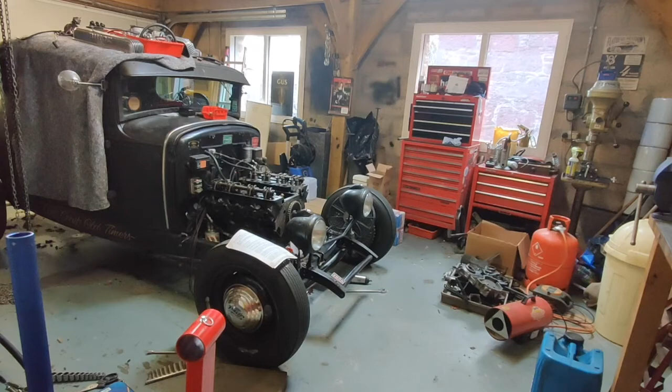You can see just what a gigantic mess everything is at the moment. Bits of my car all over it and the garage.

What's that shark doing there?

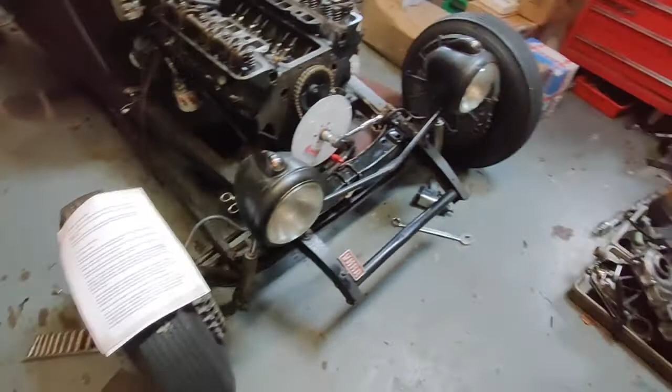Anyway, yeah, it's all a bit just whoa, too much stuff. Anyway, it'll all go back together and look great. Out in the garage, adjusting the push rods for the new cam.

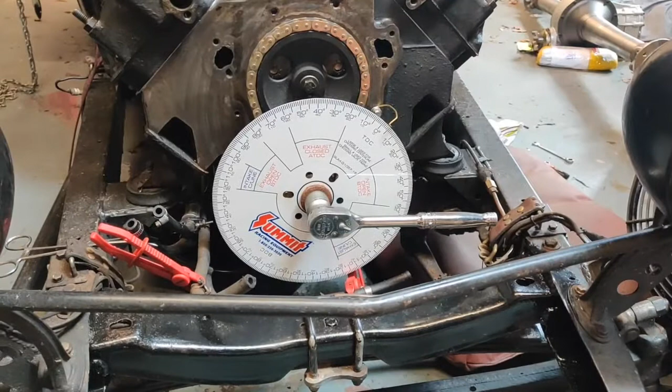It's frankly a really horrible job because you've got to get the preload using tiny little 3/8 nuts and lock nuts on this thing, and one-handed it's a bugger, but we'll show you the process and just how exciting it is. So you can see it's all set up with the degree wheel on the cam, and then we've got the new cam in all lubed up,

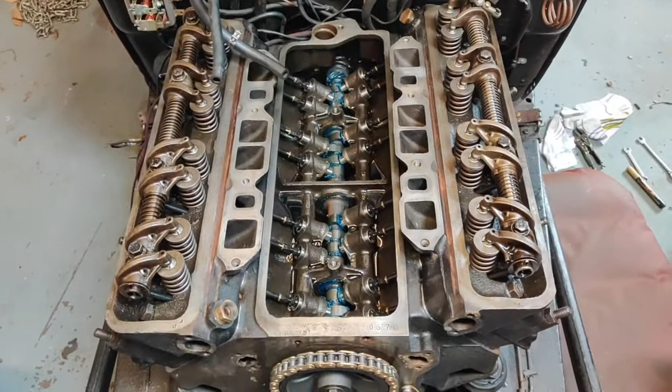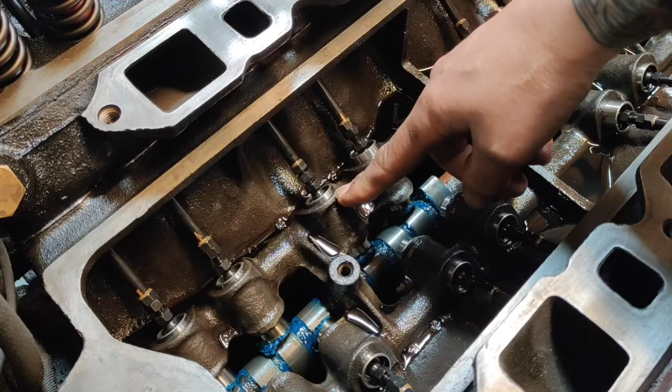yeah, setting the preload on the lifters. This is the one we're going to be watching, and then we're going to be adjusting that one. I'll explain that in a second.

Okay, so here's the theory. As the exhaust valve is opening, just as it starts to open, we adjust the lash on the intake, and then when the intake fully opens and then starts to close, we adjust the lash on the exhaust.

So let's do that. We'll rotate this until the exhaust is just starting to open. So we're going to go round, here we go. Exhaust is just starting to open there. You can see it's just coming up on the lobe of the cam.

The lights decided to go off because it's run out of battery. Of course it has.

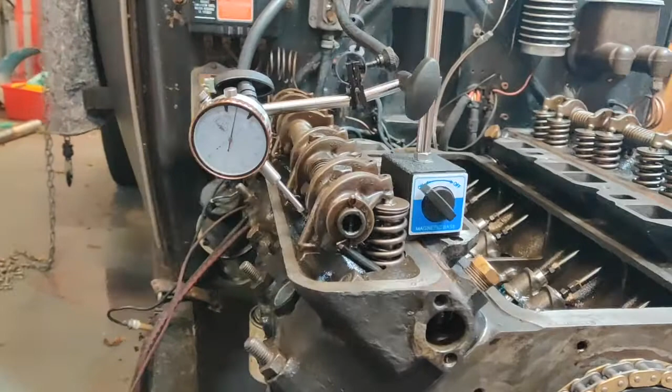Degreeing this cam is proving tricky. We've got a wheel, we've got a dial gauge which is set up as much as I can possibly get it right on the correct angle of that push rod. But the problem is the lifters, because they're not pumped up with oil, the push rod is not moving at the point when the lifter's moving, so I can't measure exactly when it starts to move.

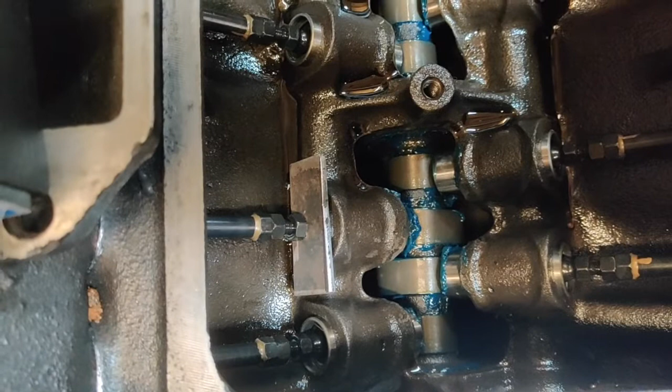So I've made a little piece which slots over the top of that, where the push rod meets the lifter, and that means that when a lifter moves, it moves the push rod at exactly the same point, and therefore we should be able to measure when that push rod's moving 0.05 so that we can get this measured.

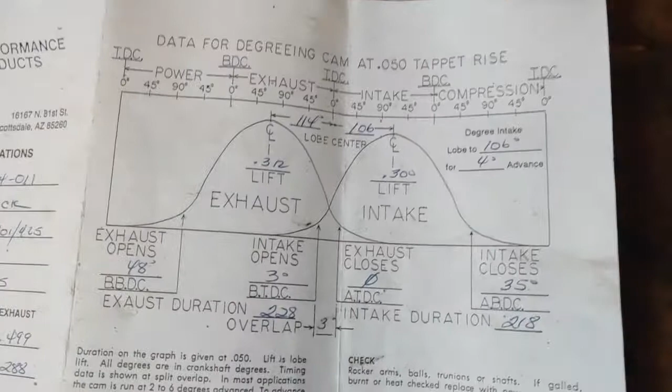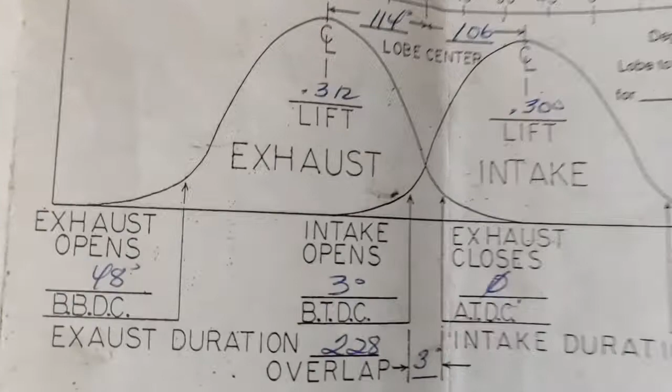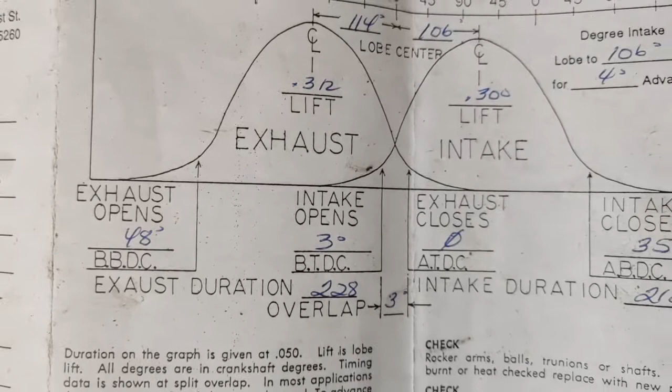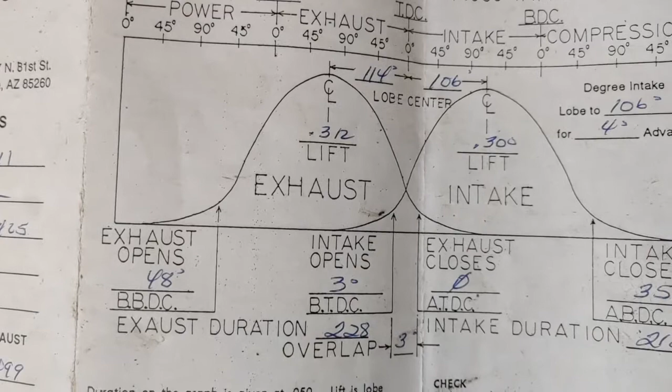Okay, so this is what we're looking for. These numbers here. I've checked the intake opens at, first of all, and it's meant to be 3 degrees before top dead center. And at the moment, we've got it at 3.5 degrees after top dead center. So it looks as if the timing gear is going to have to come off, and we're going to have to advance retard, I'll think about that in a minute, by 6 degrees.

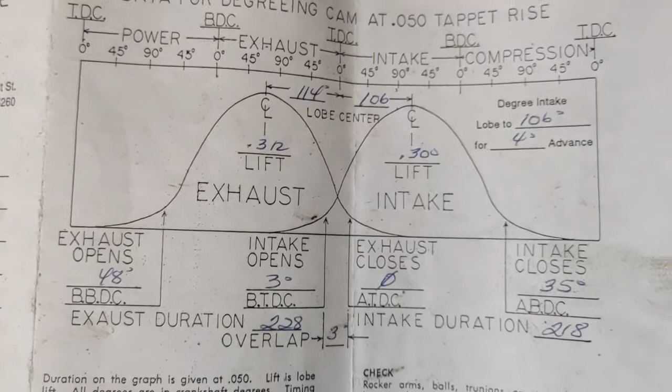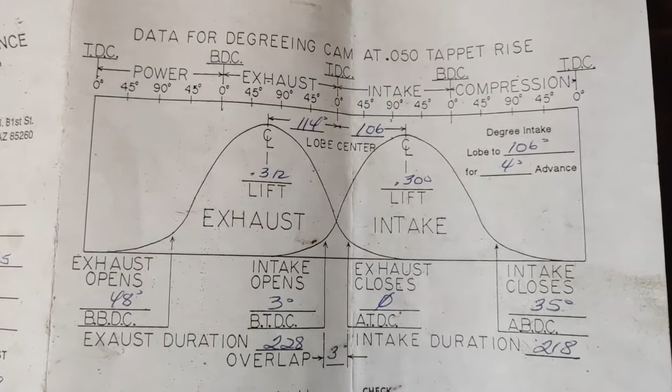Just to be double sure, I'm going to check the intake center line figure, and if that's 6 degrees out, then that'll prove that I'm going to have to take the whole thing to bits. First attempt was a cock up, because what I didn't realise was that my lovely spacer that was locking that wasn't locking it, it was moving about.

What I need to do is actually adjust that again so that I'm forcing that spacer to be completely rock solid with a push rod, which I can do by just adjusting the push rod so it's pushing down on top of that spacer. And that'll be solid onto the lifter, and then I'll be able to get a more accurate measurement. I couldn't understand why my figures were all over the place.

This is what I'm using. Just cut out a piece. And that, hopefully you can see, just slots in there and sits on top of the lifter. And now I'm going to adjust the push rod so that there's no slack, because at the moment we've got slack, and that's what was cocking up the results.

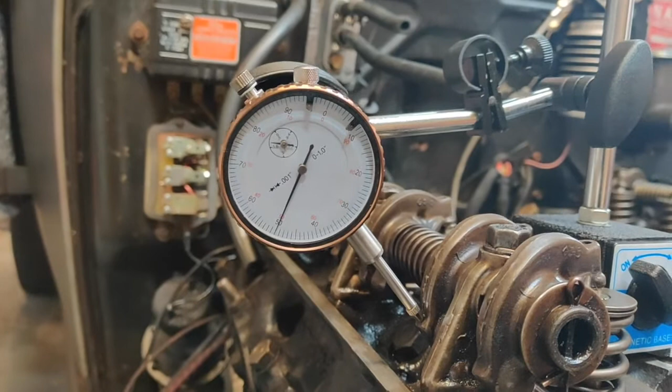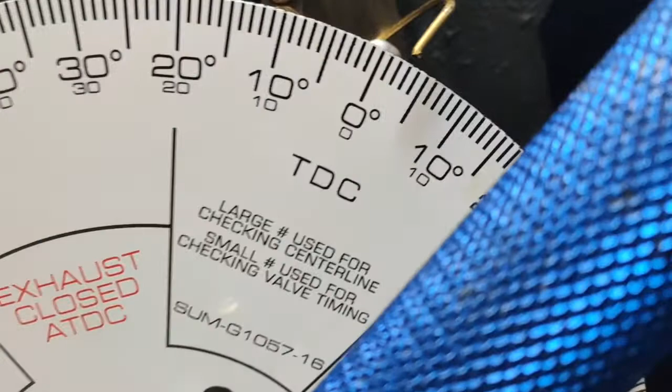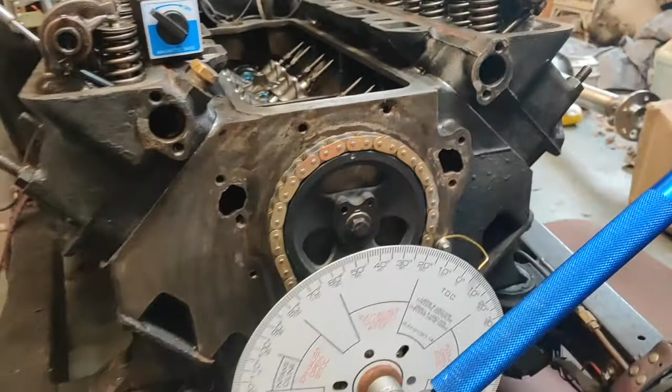Let's put a tiny bit of tension on that. Okay, so we've now got zero movement in here. We should get an accurate reading. We've got 50 lift, and that's 50 off the base circle on the intake, and we are reading, not straight onto that, but we're reading 3 degrees before top dead center, which is what it's meant to be.

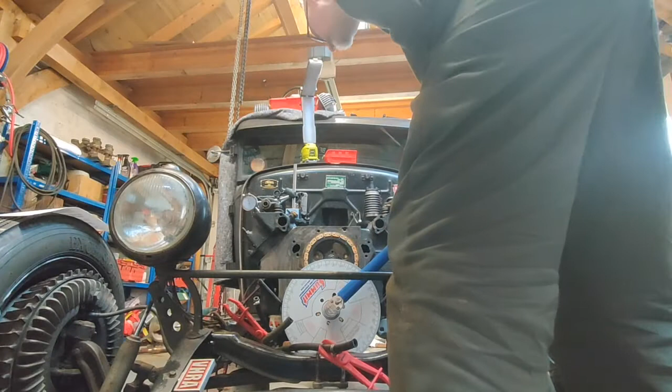So now we're going to go around and check 50 the other side of the base circle and see what number we get for that. Should be 35 after bottom dead center or something like that. I'll check. Let's find where it's going to be 50 off the base circle. Still going. Oh, here we go. And that is 50.

That's 50 off. And we are reading 45 degrees after top dead center. 45 degrees after top dead center. So those of you watching for the deliberate mistakes will have noticed that I set that up on number 3 cylinder and then couldn't understand the numbers. But of course it's all 90 degrees out on number 3. It was really tight to get into number 1, so I thought I'd check the exhaust on number 3, but that's why the numbers are wrong. So it's 90 degrees out exactly.

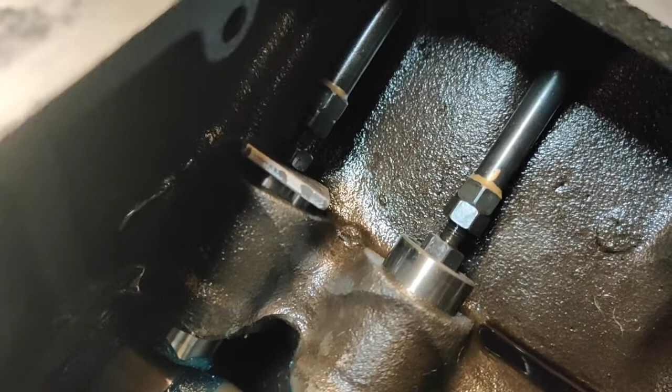I'm going to go back, modify the spacer, and check it again on number 1 just to be absolutely double extra certain before I button this up. But I reckon the numbers are spot on. So let's have a go at that. A little bit hard to see, but I've modified the spacer so that it fits in on that number 1 without hitting anything. So we'll try again. We're back on number 1. Our sneaky wee lock piece.

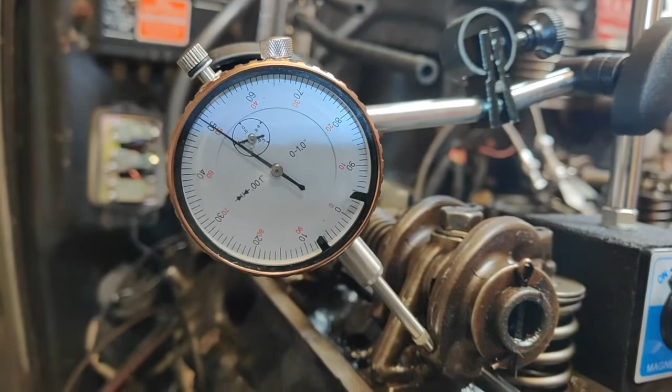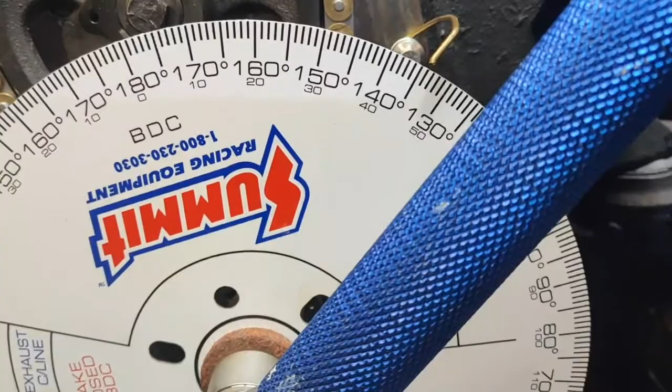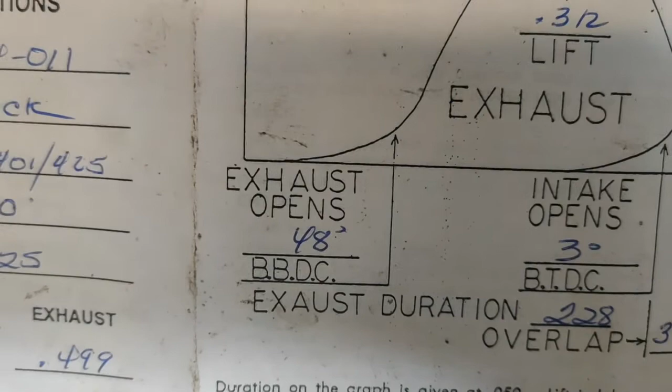We've got a dial gauge. We are reading 50 off base circle on the exhaust, and that's coming in at 46 before bottom dead center. And if we look here, exhaust opens 48 before bottom dead center, and these figures are plus minus 2 degrees. So I'm going to check the exhaust closes now, which should be at exactly 0. And if that's anything like it, I think we're there.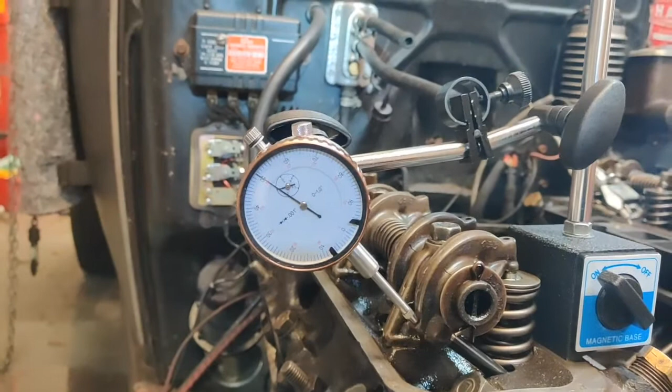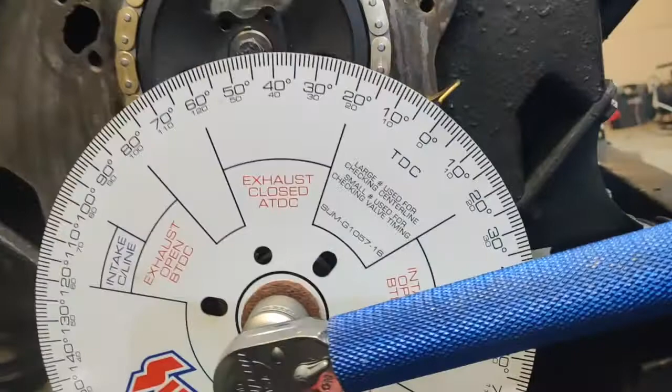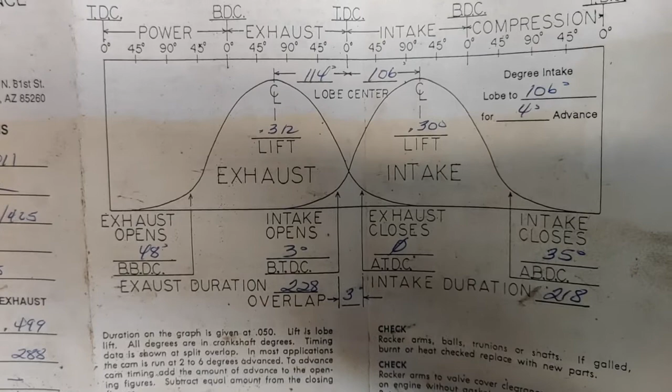This time we're at 50, and this is on the exhaust close. And we are reading about 2 degrees. Now, the figure they're quoting is exhaust closes 0. So, I don't know. Are we 2 degrees out or not? The intake was spot on for the opening. The exhaust was 2 out for the opening. I don't know. I'm going to double check it all.

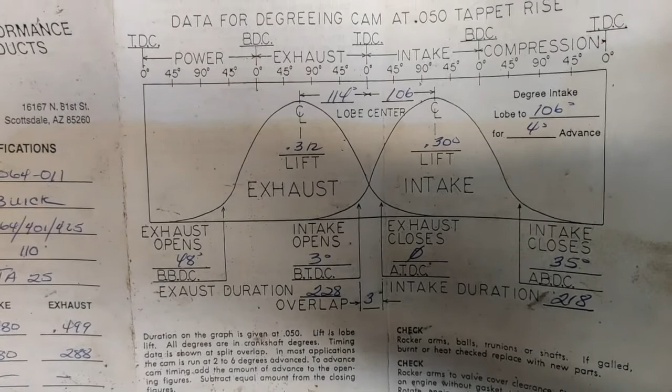Check the top dead center with the positive stop method. Putting a stop into the plug hole and then double checking degrees either side of that. And it turns out that in fact it was 1.5 degrees out on my top dead center mark on the dial. And it was in the right direction. So where it was showing opening at 3 degrees before top dead center on the intake, I was opening at 4. So that would be right. So the cam's correct. And I hope I never have to do that ever again in my life.